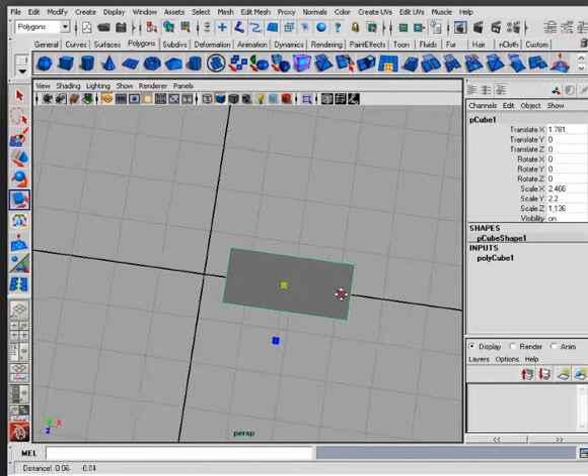I'm going to start with one side of the hammer. There's just going to be this big block shape, so I'll kind of shape this cube out, move it across the origin just a little bit, and scale it up a bit. I'm going to make it a little bit longer than it is wide. Let's go ahead and now bring in a cylinder for the center part.

I'm going to dial the subdivisions down to 8, and let's go ahead and scale this down. I'll leave it at the origin, and I'll kind of leave it right about there, make it a little bit shorter than the sides of the hammer are. Let's give 2 subdivisions on the cap. So you've got something like that. Let's now add some resolution to be able to connect this up with the cylinder.

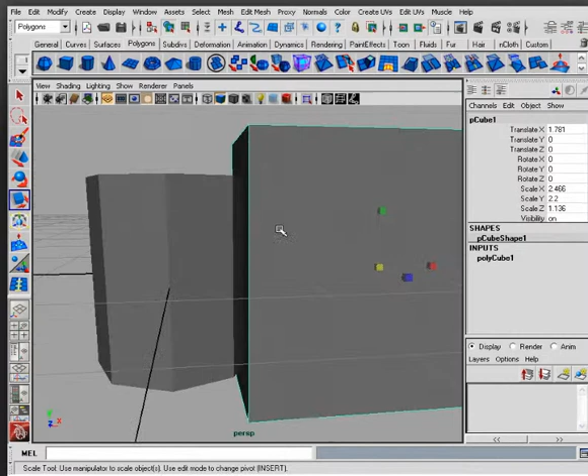So I'll go to the front view, select the cube, go to Insert Edge Loop, and let's insert some edge loops right where that top of the cylinder is, and then also right at the bottom. So right there and right there.

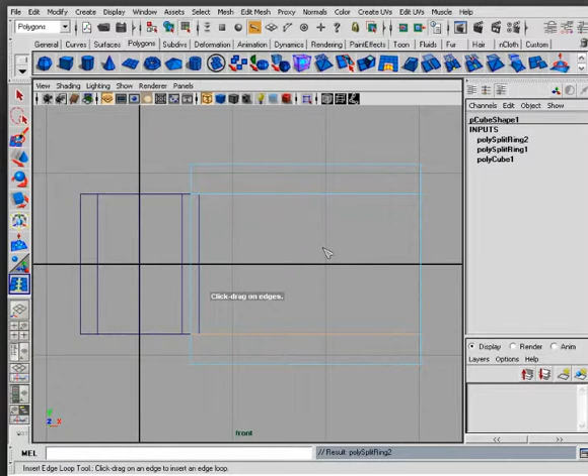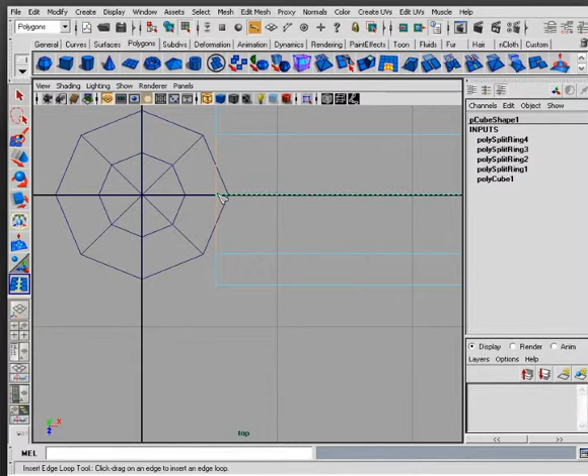Let's also go to the top view, and I want to connect this up on the inside of this, so I want a little bit of room right in here. In this case, I'm going to go ahead and widen this up just a little bit. Then let's go to our Insert Edge Loop tool, and let's add loops right in line with these points here, and then one last one right in the middle. So what that does is create a nice base for us to be able to connect this cylinder up to this cube.

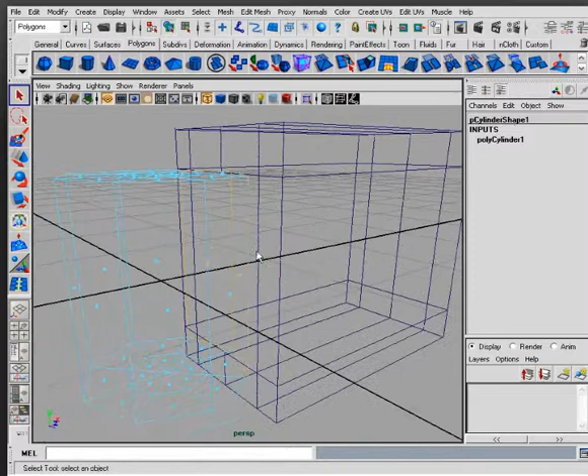Let's now go ahead and delete those 2 faces right in here. Let's go ahead and take the cube and delete those corresponding faces. Now let's take both of those and we want to combine them, so let's go ahead and go to Mesh Combine.

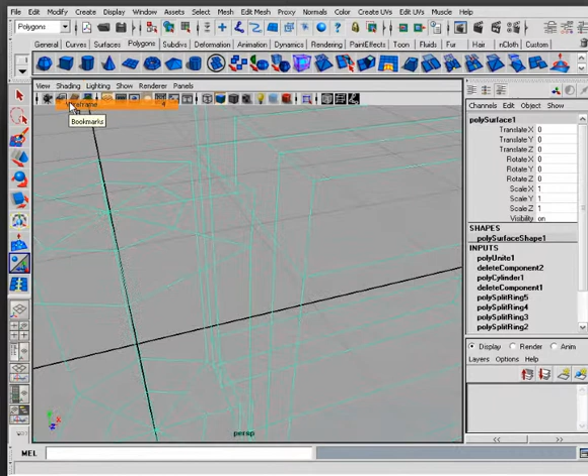Now I'd like to merge the vertices together. I want to maintain the vertices that are at this square part, so I'm going to move the vertices from this cylinder, using the Merge Vertex tool. I'll open up the options, make sure it's set to Target Vertex, and now I'll click on the vertex from the cylinder and drag it over to the corresponding vertex that I'd like to connect it up with. So I'll just come in and connect all of these together, and then we get something like that.

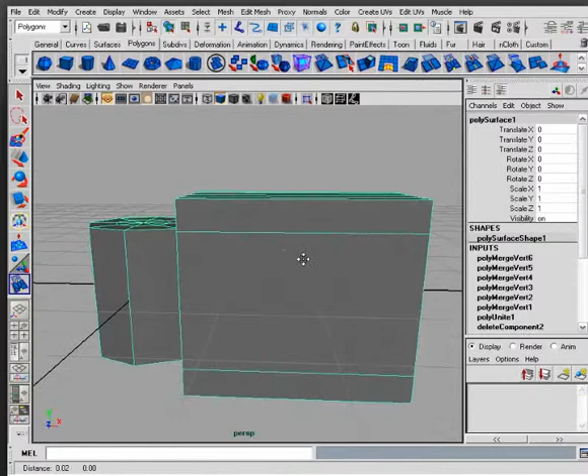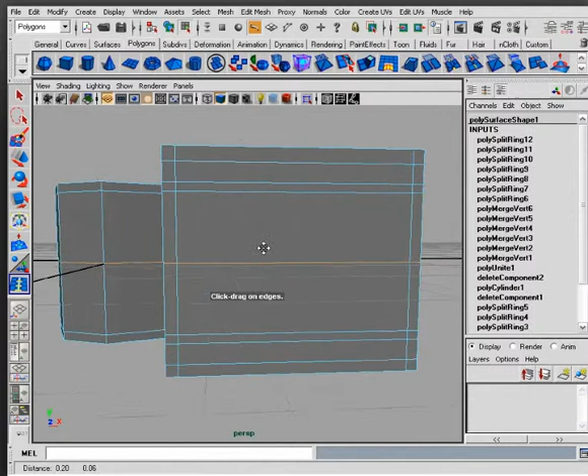Now we're going to be taking this into ZBrush to sculpt, so I want to add a little bit of resolution in certain areas where I don't want it to smooth as much, maybe on these corners, maybe up here and down here. I also want this to be a little bit sharper, so I'll add some edges right in here, and then I'll add some edges in here to square this geometry up so that when we sculpt it, it's a little bit easier to subdivide. We're going to have some long polygons in here because of this, but that's okay.

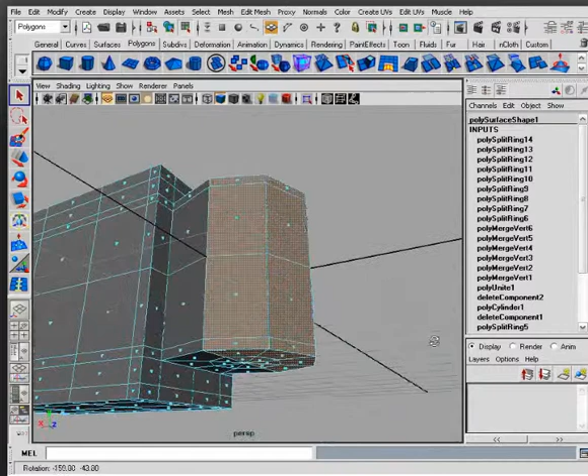Let's go ahead now and create the mirror image of this. I'll go ahead and delete this half of the cylinder, delete that, grab the whole thing and then go to Mesh Mirror Geometry, and we want to go in the negative X direction. So we'll choose negative X, merge with original, merge vertices, and go ahead and mirror that.

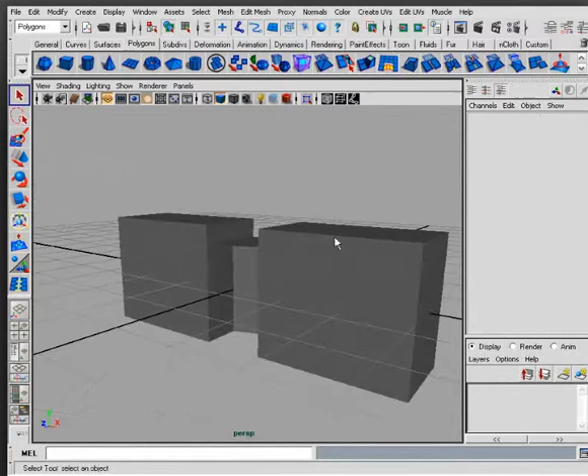You can see our threshold is set too high. It's merged some vertices that we don't want merged. So we'll go ahead and go to that mirror node and dial that threshold down to something like 0.01. Check it over, make sure it's nice and clean, and go ahead and take these faces up here on top.

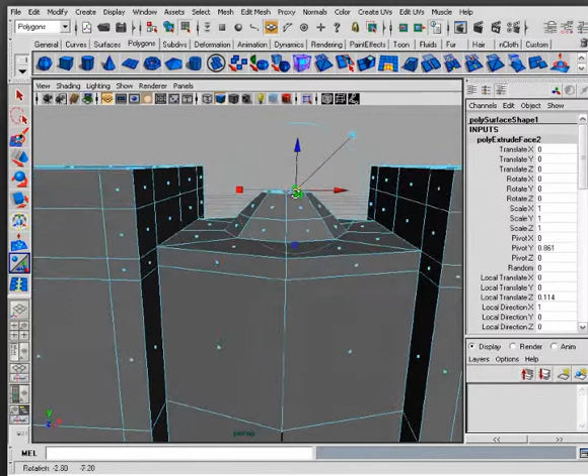Alright, go ahead and extrude these, and this is where our spike is going to start to come out from. So we'll just create a little bit of a bump up here, and just kind of scale this in and down. Something like that.

And then down here, this is where our shaft is going to come into the hammer. So we can go ahead and maybe scale this up a bit and sort of extrude that down to something like that.

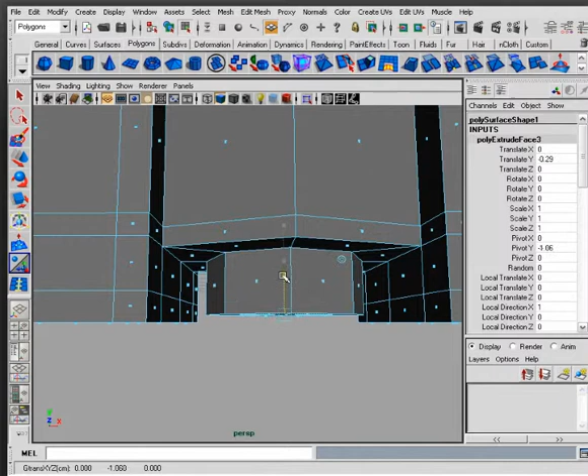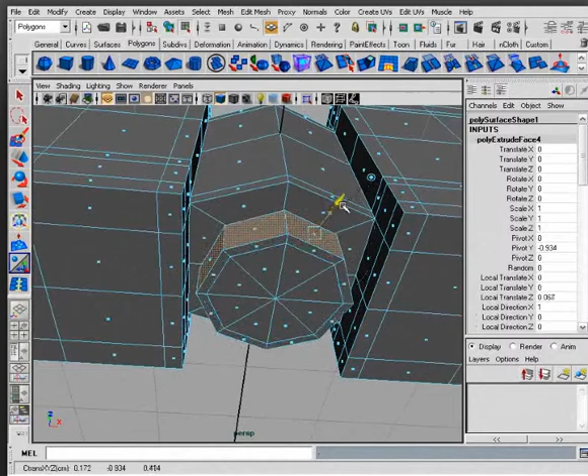Maybe we come in and insert an edge loop right in here and then take these faces that we've got here and just check those, make sure that we don't have anything else, which we do. Okay, and go ahead and then maybe extrude those out a bit to create the area for the shaft to come into.

So for the spike, let's go ahead and just start with a cube. Okay, bring that straight up. Scale it down so the base of the cube is kind of about that size.

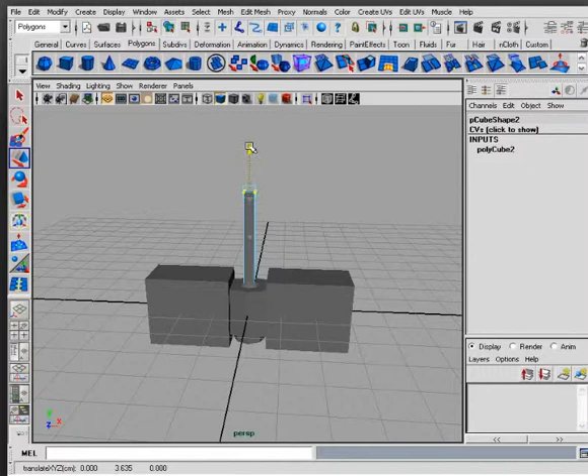Alright, let's go ahead and now take the vertices of this cube and pull it up to the height that we want our spike to be. Okay, so something like that.

Let's go ahead and take these faces. I'll just select all the faces around the sides, and let's turn off Keep Faces Together under Edit Mesh, and now extrude those, and let's pull those out. Okay, and we can scale them down a bit if we want to.

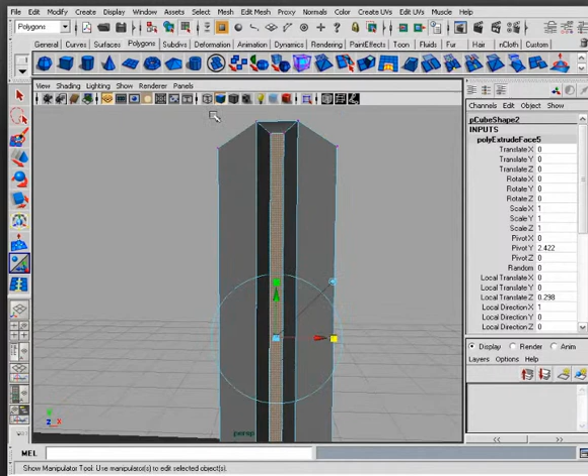Scale those down in the X. Alright, go ahead and take these points up here and scale those down.

Okay, and then if you want to take these, you can kind of move them up a little bit, and it gives us kind of our spike. And we can take this center and really scale that down and pull it up a little bit further.

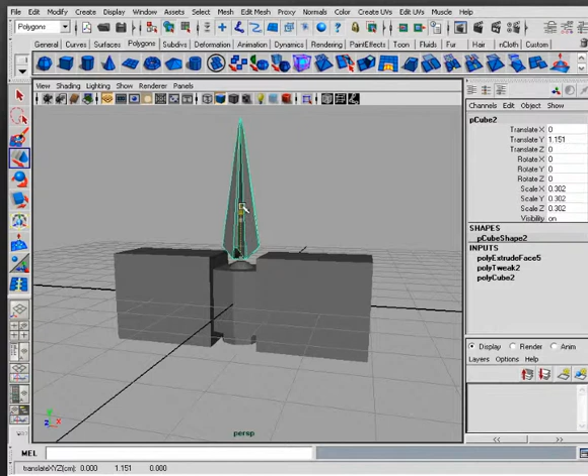Alright, so end up with kind of something like that as a spike for the top of our axe here. If you want to move this up a little bit, you could take this bottom face and just extrude that down in. We don't need the one that's inside here, so you could just delete that polygon.

Alright, and now for the shaft and the handle, it's going to be fairly simple, just another cylinder. And let's do another 8-sided cylinder. We'll go ahead and scale this down a bit until it fits right inside there. And then we could just scale this up in the Y direction.

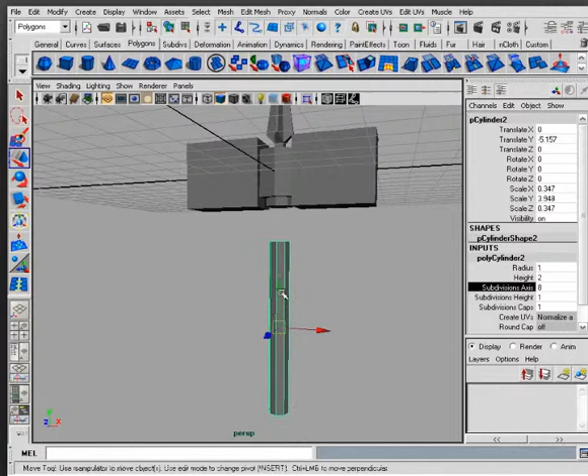Okay, that's probably a little bit too long. Then we get something like that. And go ahead and delete the faces on the top and the bottom.

Grab another cylinder for the handle. Again, we'll go back to 8 subdivisions. And then we can just scale this up.

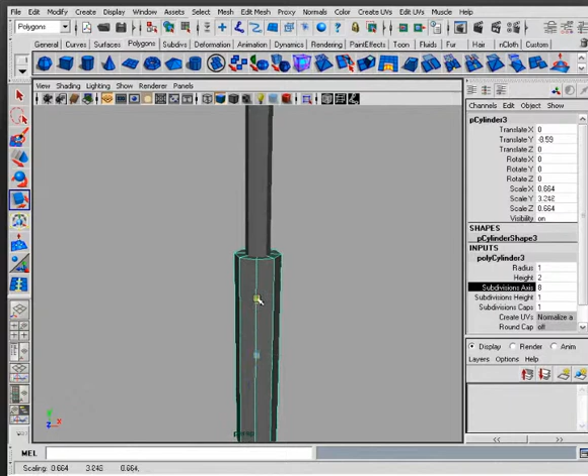And you don't have to follow me exactly. Feel free to kind of create your own little weapon, any kind of little additions that you want to make. We're just doing something simple so we can illustrate the topics that we're going to be talking about.

So I'll just make this a little bit bigger than the shaft, and I want to add a little bit of detail on the top and the bottom. So I'm going to go ahead and go to our Insert Edge Loop tool and just come up here and down here and then select those faces.

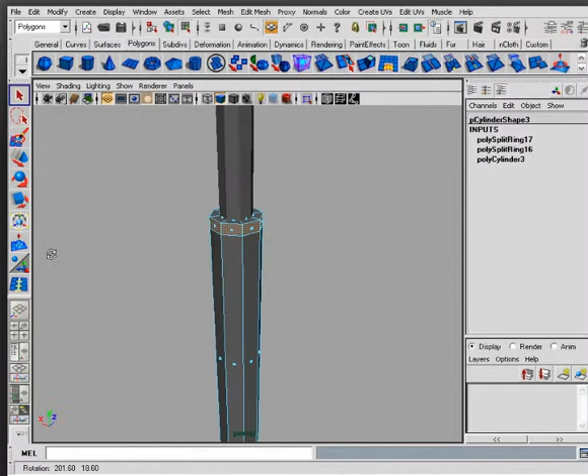All the way around and extrude those out. Oh, want to make sure that we've got our Keep Faces Together turned back on. And just pull that out a little bit.

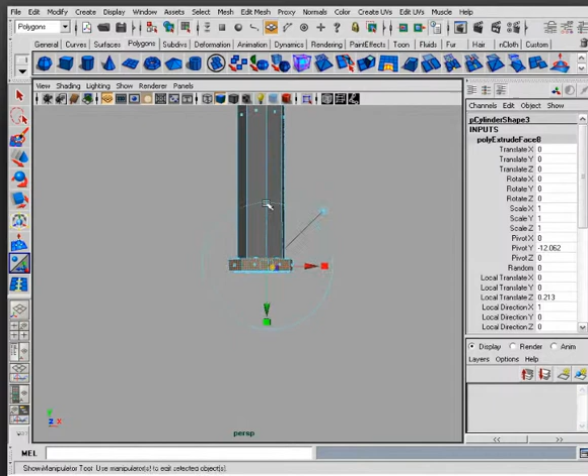Okay, same thing down here. Just extrude that out a little. Okay, and you can create a little bit more of a sort of pommel in the back if you want. Have kind of a ball back there, but I'm going to go ahead and leave it like that.

So you might want to go ahead and break up some of these long polygons just for our sculpting purposes, just by coming in and breaking this up a little bit with our split, or with our Insert Edge Loop tool. Okay, same thing down here.

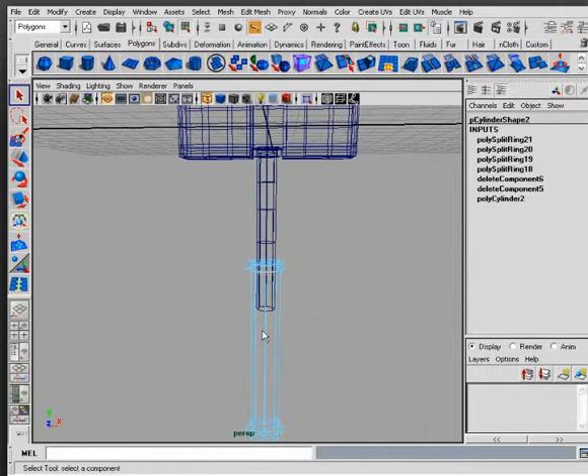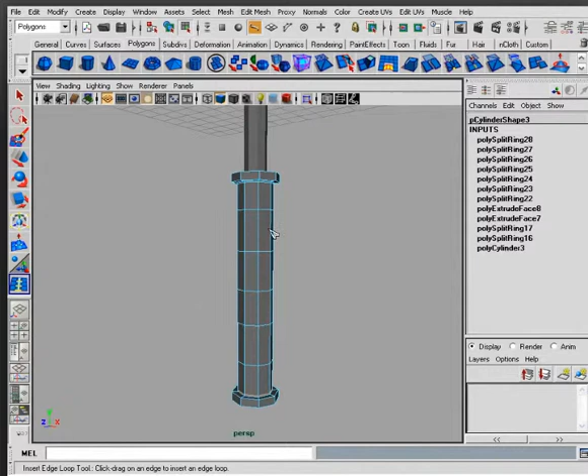You may want to come in and just add some edge loops in here to kind of break things up a bit. Okay, so you've got a little bit more sculpting resolution to work with rather than having to work with these long thin polygons. And this is going to be probably a little bit too high res for our final product, but it'll be a good base for our sculpting.

Alright, so it's kind of our low res base that we're going to be using for our sculpting. In the next lesson, we'll look at how we can work with our UVs to get those straightened out before we actually take this into ZBrush and start assembling it and doing some sculpting and painting. So we'll look at our UVs in the next lesson.